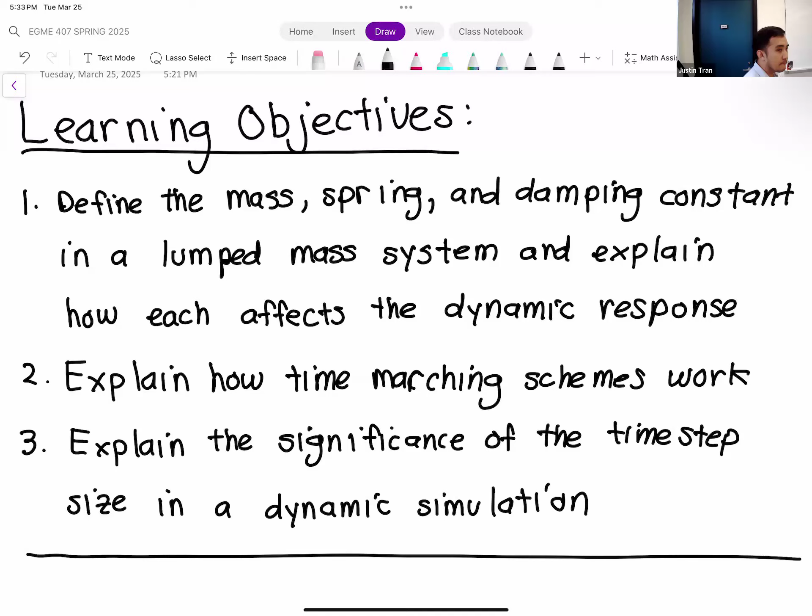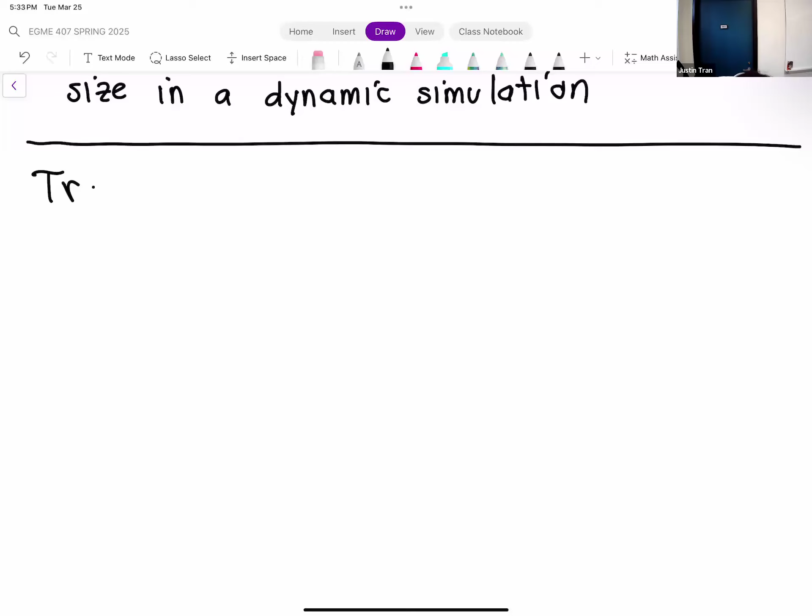So the topic for today and the topic for this week are what I call transient finite element simulations.

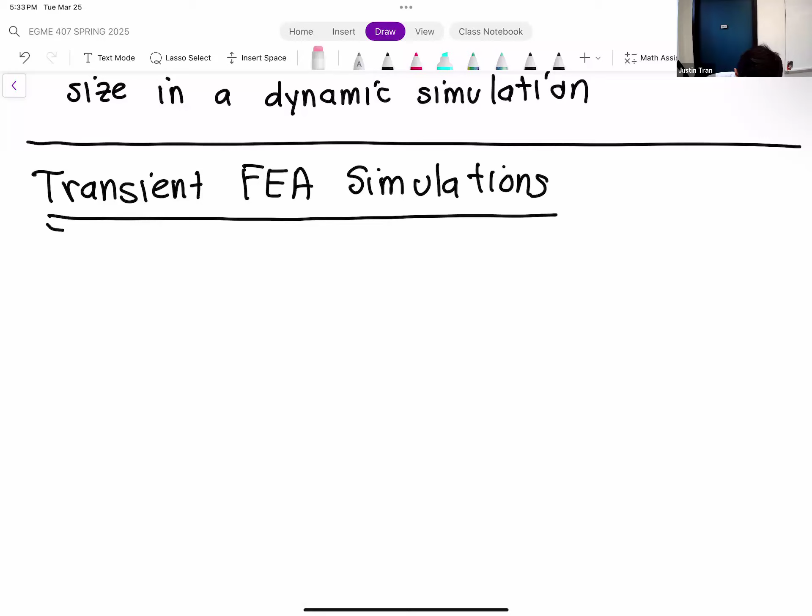Transient simulations are actually a very interesting topic. Depending on the type of work and the type of analysis and systems that you work with, you might work exclusively with transient FEA simulations. There's a lot we can dive into here, but for this class, the way it's structured, we only have a week to talk about it, which is kind of a shame. Just know that there's a lot out there. So transient FEA simulations are nothing more than simulations of engineering systems that change with time.

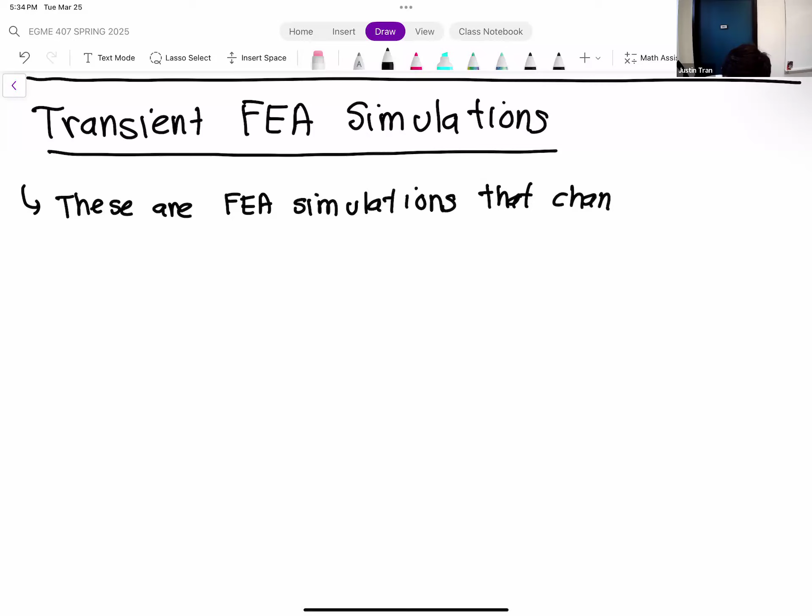Which is a big shift in focus from what we've been doing, because everything we've done so far in this class has been static simulations. Those are situations that do not change with time. So transient is kind of the opposite.

Most commonly, you'll find these types of situations whenever you have some kind of dynamic response. Either a load that's being applied on your structure is changing with time, or maybe something occurs on a very quick basis, and your response changes with time as well. So transient simulations and dynamic response kind of go hand in hand because they mean the same thing.

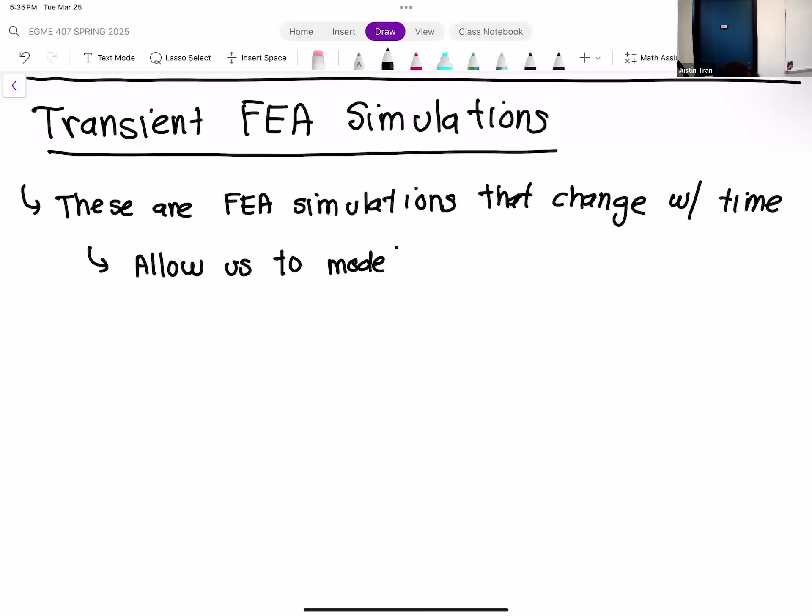So I think for the first time in this class, we're actually going to use a tool in ANSYS that is not static structural. We're going to move away from that for the first time. ANSYS actually has a few different tools or packages to do transient simulation, and we'll mention them a bit. The first one, the main one we're going to use, is something called explicit dynamics.

We'll talk a bit later about what that means, especially what 'explicit' means. And the other tool in ANSYS that we're not going to use, although the setup is very similar, is called transient structural.

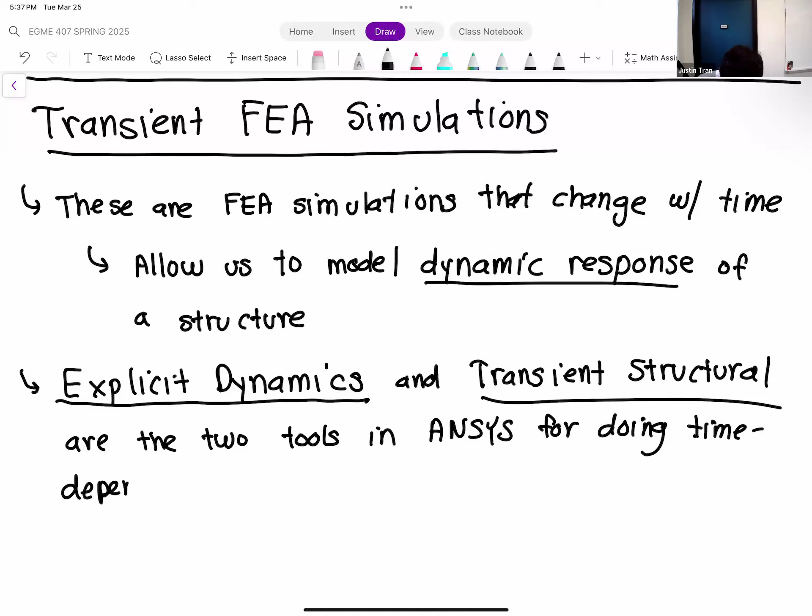So if you want to do time-dependent or unsteady structural simulations in ANSYS, those are the two main packages you can use. Now, any phenomenon that you can simulate with FEA, you can do in an unsteady context. So you can also do an unsteady thermal simulation - there's a package for that.

You can do unsteady fluid simulation, although most fluid simulations are going to be transient just because fluid is always in motion. But for this class, we focus mostly on structural mechanics and structural dynamics, so we're mostly going to use these two, specifically explicit dynamics. When we do our activity on Thursday, we're going to use explicit dynamics instead of static structural.

So like I mentioned, unsteady numerical simulations in general - not just finite elements, but also finite difference and finite volume - is a very, very rich topic, and it's really impossible to go over all of it in one day.

My goals for today are to get you used to some of the lingo, some of the terminology used in these dynamic simulations, just so you know what to expect, and also a little bit of review in terms of what kind of behavior you generally expect from a dynamic structural response.

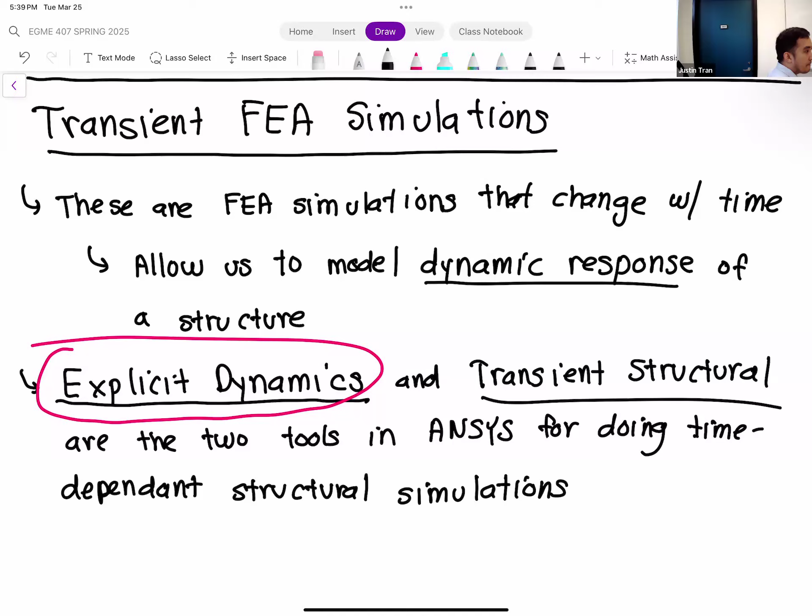Okay, all right, so let's review a little bit of dynamic response first. And to illustrate this, to give us an analogy, let's use a mass spring damper.

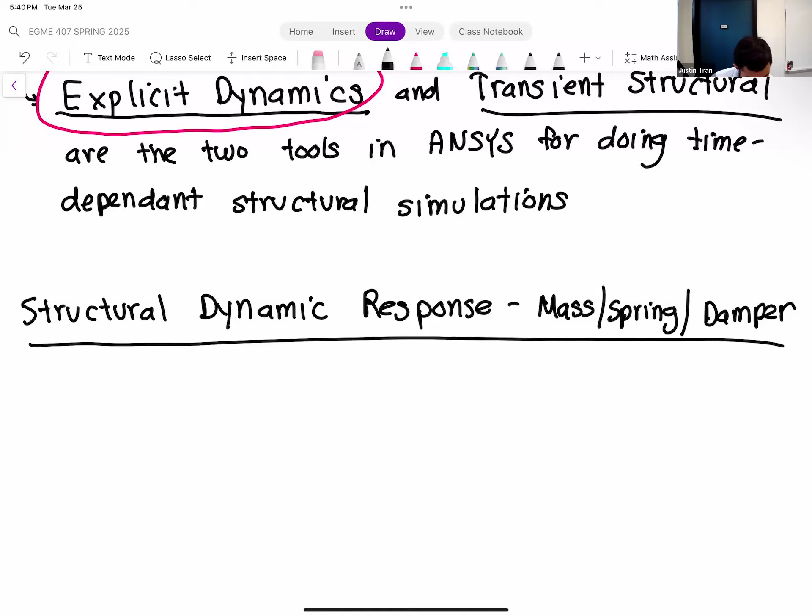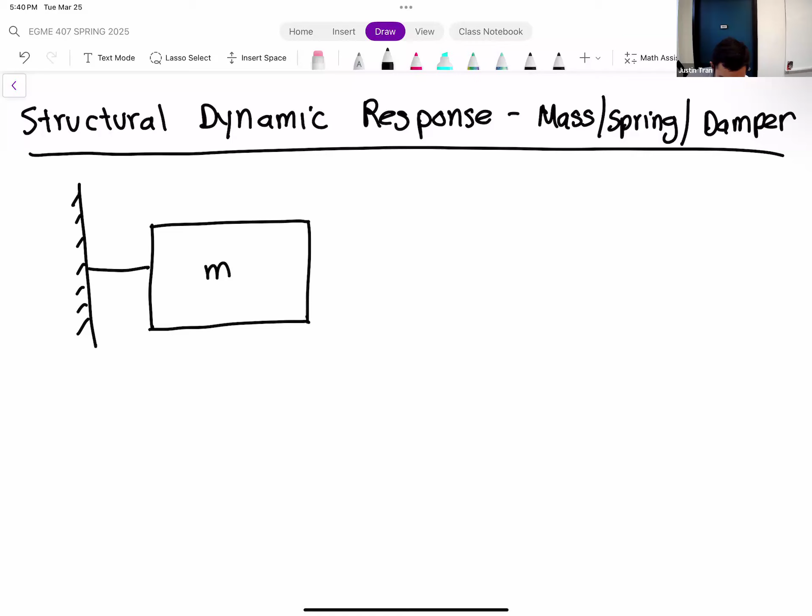Okay, so let me go ahead and draw our mass spring damper here. So we have a wall, which is where our mass is going to attach to. We'll say the mass is on wheels, just so we can displace to the left and right.

And then attached to this mass, we have a spring. So that's going to provide our structural stiffness. Our spring has a spring constant K. And then to provide damping into the system, we have a dash pot.

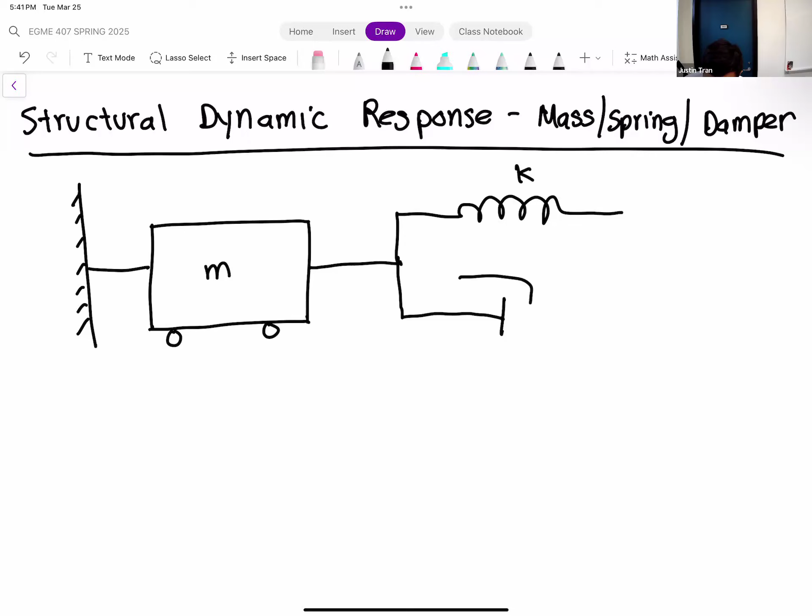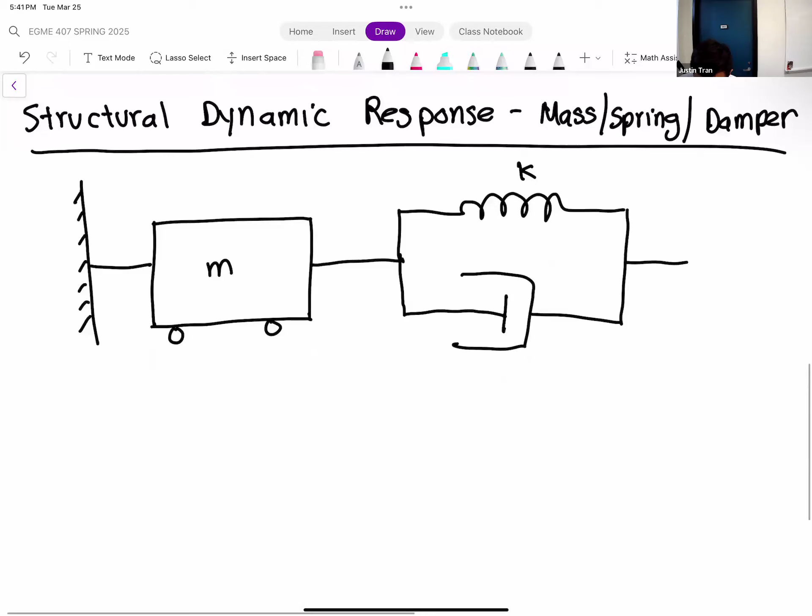So the dash pot or the damper here represents any kind of energy loss that comes, usually due to friction in the system. Usually we give that the coefficient B. And then pulling this entire structure is a horizontal force F.

Okay, so if we model the behavior of the mass, usually for the mass spring damper system we are interested in the motion or the position of the mass M. So what we're modeling here is this position. X here represents the position of the mass M.

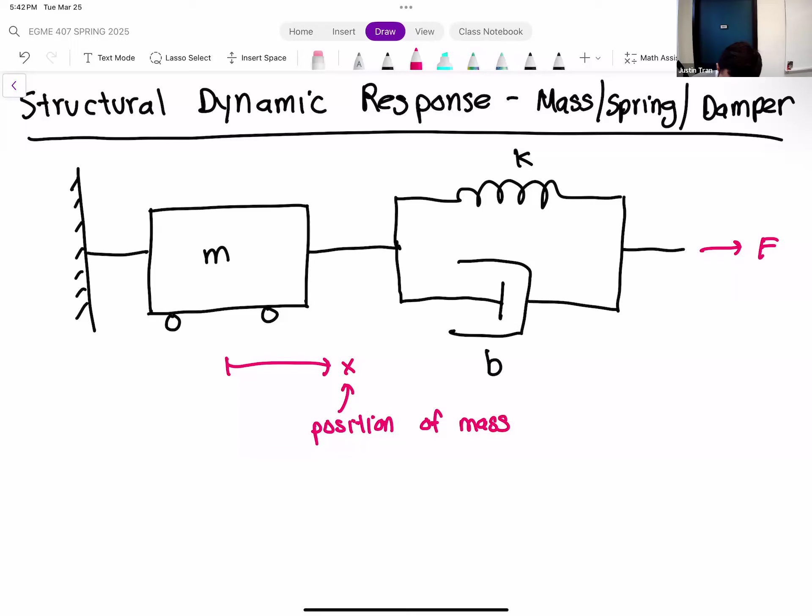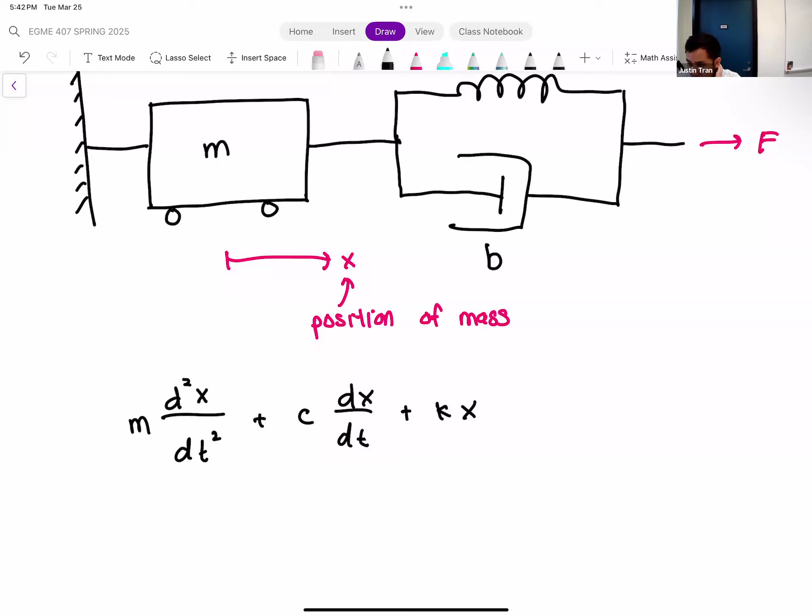Typically, we model this response using a second order ordinary differential equation: M multiplied by the acceleration, but acceleration is nothing more than the second derivative of position. So that's d squared x dt squared, plus C dx dt, plus K times x. That is our spring term here, that's our Hooke's law, that's equal to F.

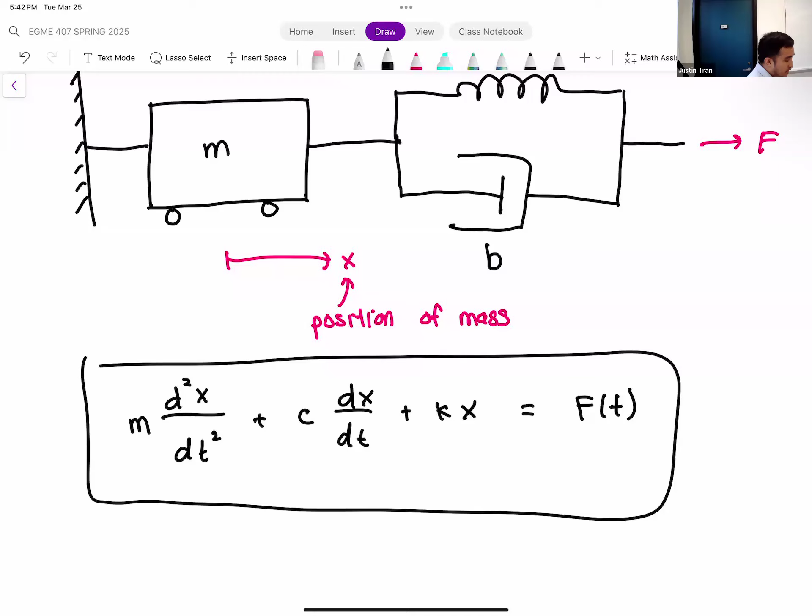Where F here can be a function of time, okay? So it's not just a static force - this is a force that we may push it, pull it back, push it, pull it back, something that we can change with time. So this here is our equation of motion, or the mass position.

So this is just an ordinary differential equation, but there's actually a lot of information you can glean from this. And in fact, a lot of the intuition that we build from the mass spring damper, you can apply that to larger, more complex systems as well. That's kind of the goal that I'm going to go with here. All right, any questions on this so far?

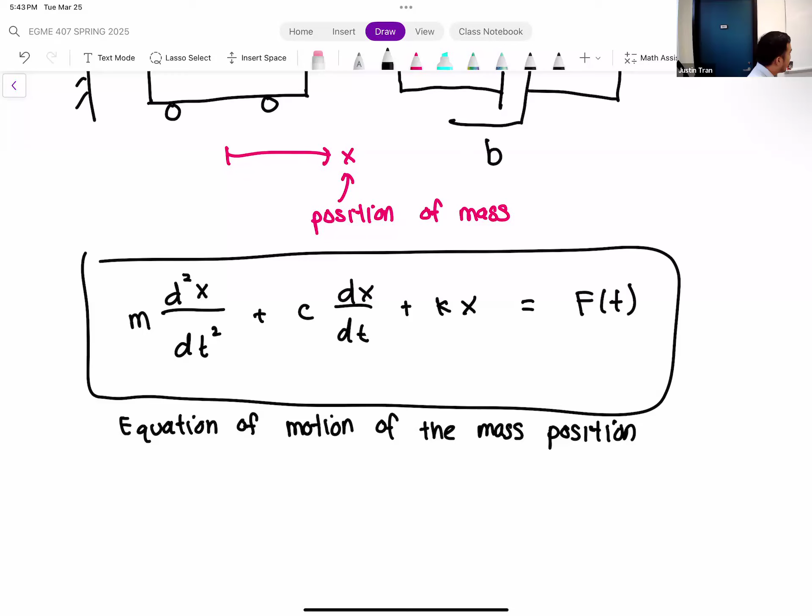Okay, so before talking about the response, let me make the comment that most structures, or pretty much all structures, no matter how complex, you're always going to have a sense of how much mass is in the system, how much stiffness is in the system, and maybe some sense of how much damping or friction is going to be within the system as well.

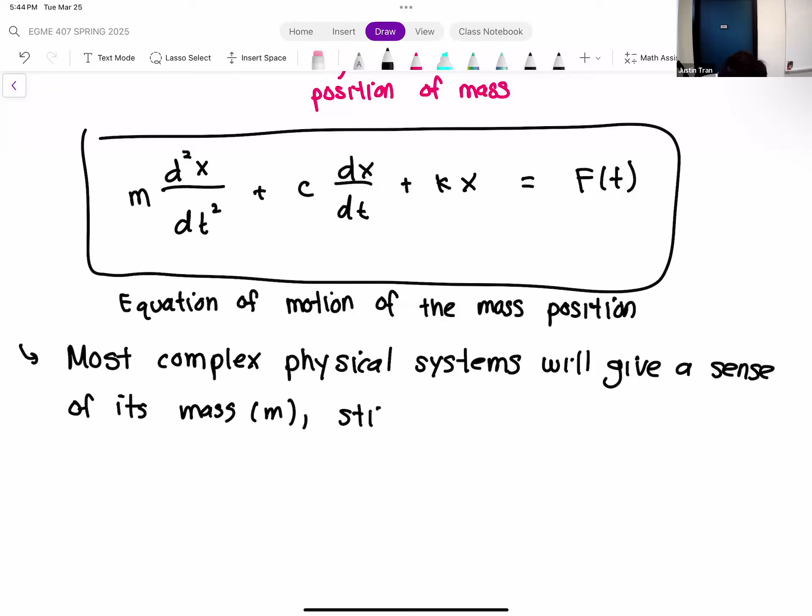So mass obviously is very easy to figure out - you can just compute the mass of your entire system. Stiffness is going to depend on things like the geometry and the material properties as well, so whatever you choose for the Young's modulus is going to affect the stiffness of your system. And the damping often is a function of how the different parts of your system interact, kind of the geometry a little bit. So usually you're going to have some sense from that as well.

Okay, so the goal with this mass spring damper, and kind of the reason why it's brought up - probably this is the 13th or 14th time you might have seen this in your engineering classes - is because a lot of the intuition, a lot of what we understand from the mass spring damper applies to more complex systems as well. Maybe not the exact solution, but at least the character of the solution and the general behavior.

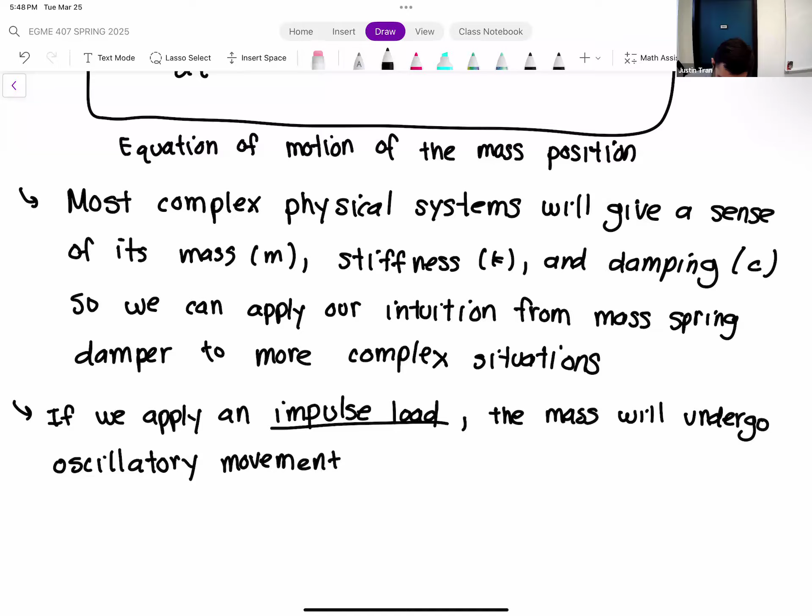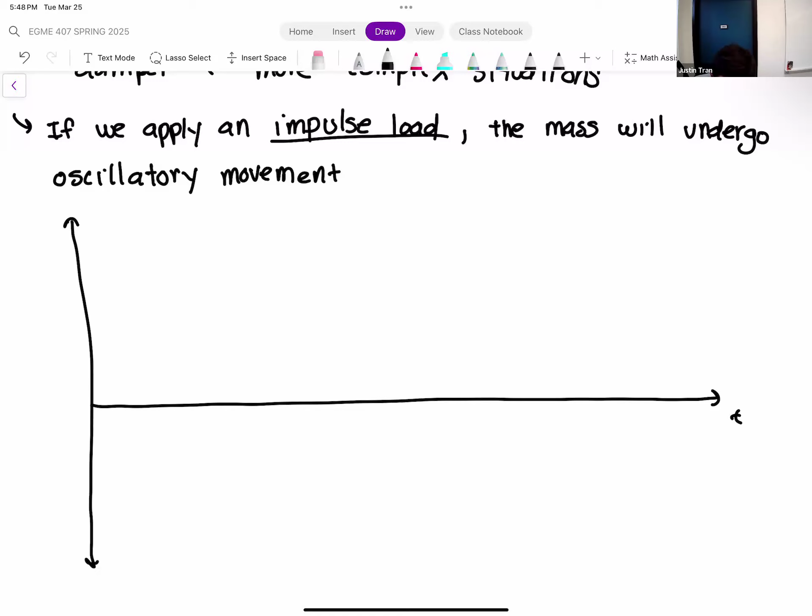And so if we were to plot that out, on the horizontal axis we have time, so we're plotting out the response of our system as a function of time. Vertical axis, we have the position of the mass, x of t, okay?

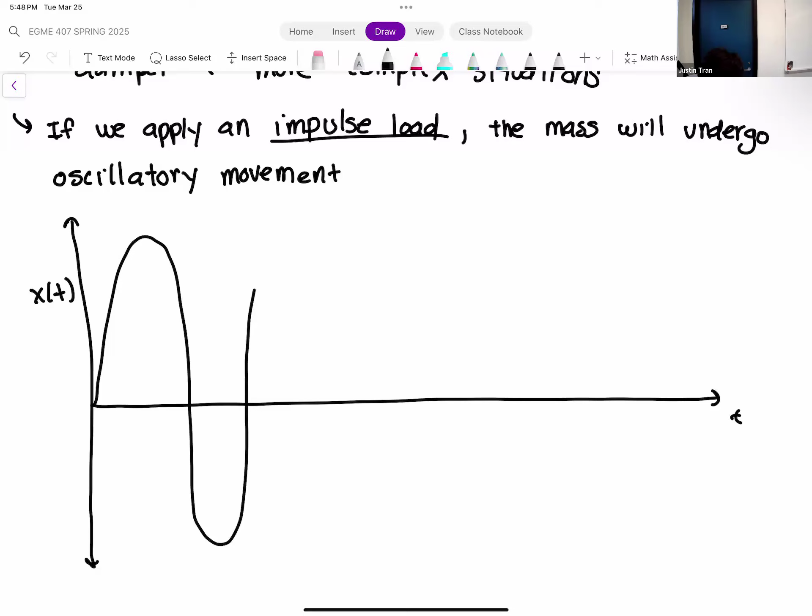So an oscillatory response means that our position of the mass is going to oscillate back and forth, okay? And it's going to look something like this. So that's kind of what it means to oscillate, it goes back and forth. And if you notice the way I drew this oscillation is very intentional - the amplitude of the peaks is decaying as a function of time.

So that's very common as well. Nothing, unless you have a perpetual motion device, most vibrations or oscillations die down with time, right? And so if we were to plot this out, our x of t here will be a multiplied by e to the minus bt, multiplied by sine of omega t. Where if you break down this response, we have a times e to the minus bt. What we have here is called a decaying amplitude.

This shows that the amplitude of oscillation for this response is decreasing as a function of time. Then we have sine omega t, and that is the oscillatory component - the part that's going to oscillate back and forth.

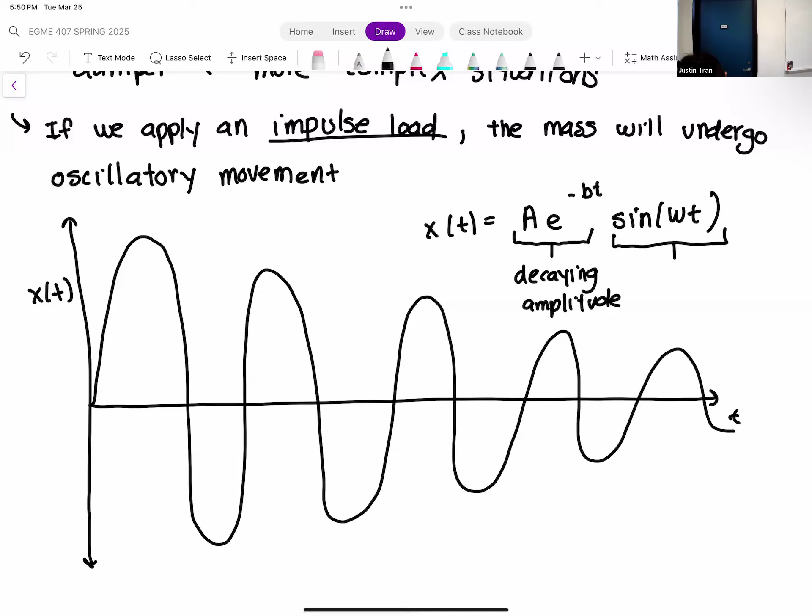So this is kind of the general dynamic response for any kind of structural system, okay? So if you apply an impulsive loading, it may not be on a time scale that you can observe clearly with your eyes, but there is some kind of vibration there, right?

So if I were to take this projector thing and just hit it like that, right? You can kind of see - well, I can see because I'm right in front of it, but you guys might be able to see. Zoom people, you definitely can't see, right? But each time I hit it, there's a little bit of oscillation that goes on - it goes up and down a little bit before it settles into its final position.

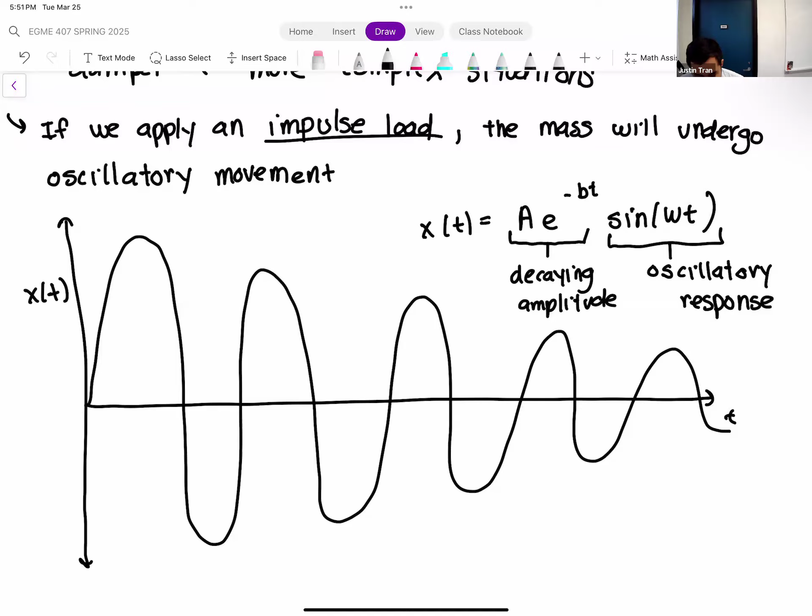So this idea that when you apply impulse loading to a structure, the dynamic response is almost always going to be oscillation of some kind, right? This is especially true if you have a linear isotropic material, linear isotropic stress-strain response in the system.

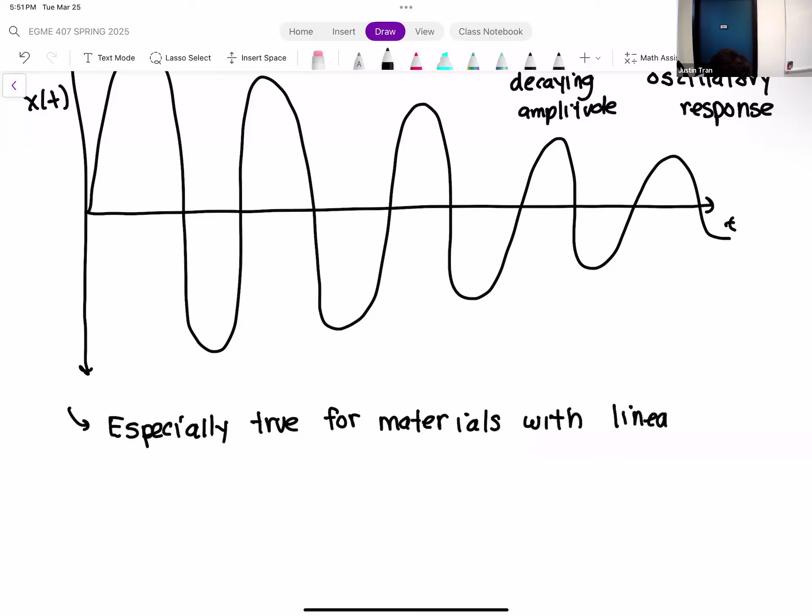Which, if you notice in this class, that's typically what we work with. So typically we work with materials - we assume just a very simple linear elasticity for our response. So we're going to be in this regime, right? And so when we run the dynamic simulation on Thursday, you're going to observe this.

If you haven't, I know some of you have done this activity with me before, but on Thursday we're going to be simulating a car crash. We're going to be taking a car's frame and just crashing it against a wall. You're going to see a little bit of oscillatory response. That's because we are providing an impulse loading, and the car is going to be impacted by the wall only for a very brief moment of time. But it's also a result of the linear elastic material that we're assuming for this car, okay.

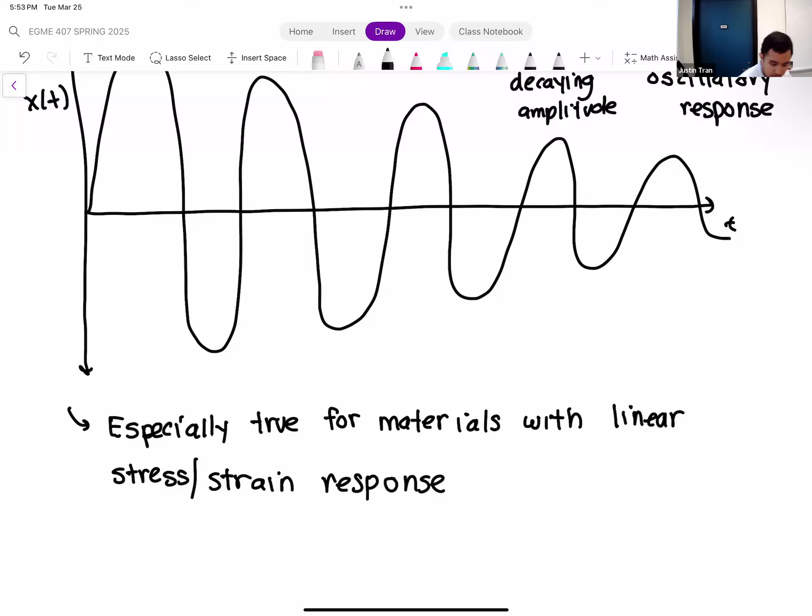And so the character of the oscillatory response is a big part of doing dynamic structural simulations. Any questions on this so far? Okay, all right. So the big question is, how do the properties of our structure, or the properties of our simulation, affect the dynamic response?

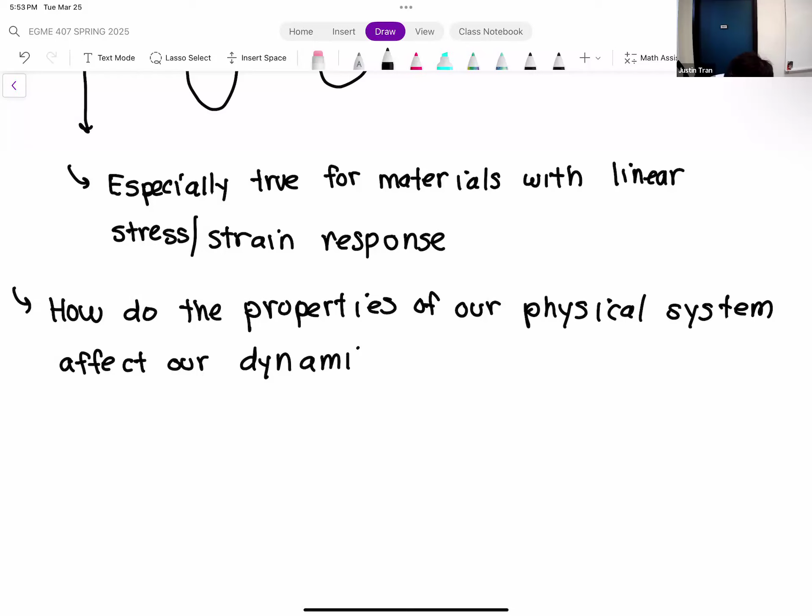And so in particular, just for the case of simplicity, we're going to focus on the properties of our mass-spring-damper and see how that affects our dynamic response. So we'll go one by one, starting with the mass. Generally the mass represents the amount of inertia there is in your system. And if you remember the definition of inertia - it's the ability of a structure to resist changes in motion. So the more mass you have, the more inertia you have, the more you're going to resist changes in your motion.

So generally what we say is that as the mass increases - if you increase the mass of your system - it's going to reduce the frequency of the dynamic response.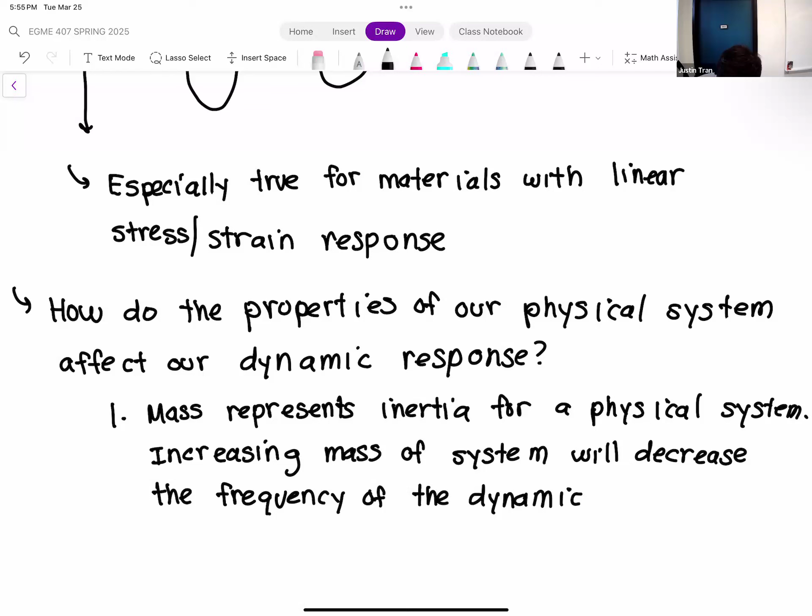Because the frequency of the dynamic response represents each time the mass oscillates up and down, that represents a change in momentum. So if you have more mass, it's going to resist that. The more mass you have, the smaller the frequency.

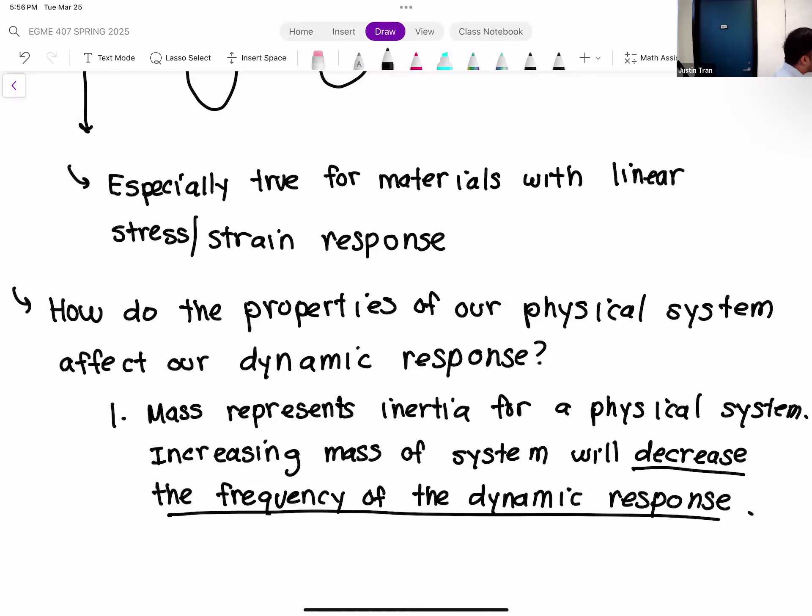Number two, let's look at the stiffness. If you think back to what a spring constant represents, it tells you how much restoring force the spring is going to apply, right? Because that's the hallmark of a spring. If you deform a spring, stretch it or compress it, it's going to apply a restoring force to bring it back to its equilibrium position.

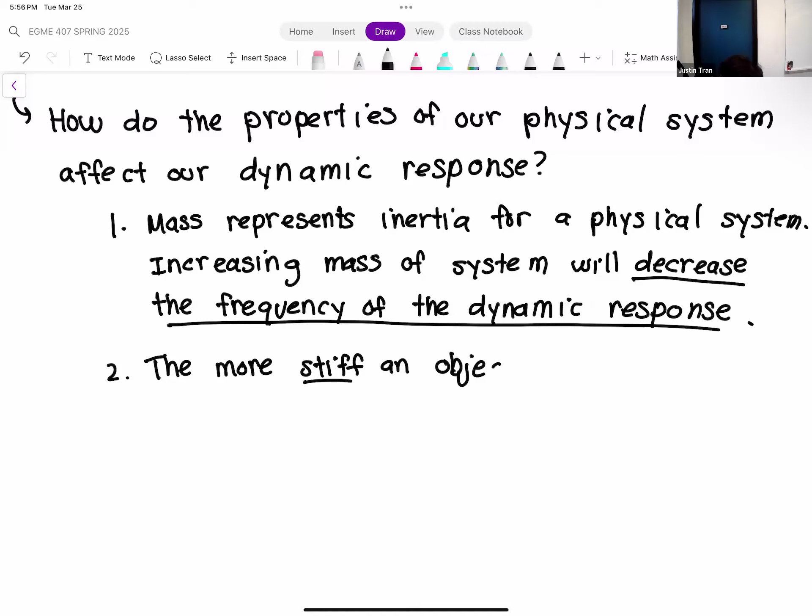Every structure has a stiffness, and like I mentioned, that's a function of its material properties and its geometry as well. So the more stiff an object is... and the main property you use to measure this is the Young's modulus.

The stiffness of a structure has the opposite effect of the mass. The more stiffness you have, the more internal forces, the higher stresses you're going to have internally when you deform your structure away from its equilibrium position. So the more stiff a structure is, it actually increases the frequency of the dynamic response.

So mass and stiffness kind of work opposite to each other. Now, granted, sometimes mass and Young's modulus are correlated for a material. Generally, the more dense or heavier materials also have a higher Young's modulus, so those effects kind of cancel out in a way. But there are materials that are very light but have high stiffness, and also materials that are very dense and heavy but have low stiffness. Something to keep in mind.

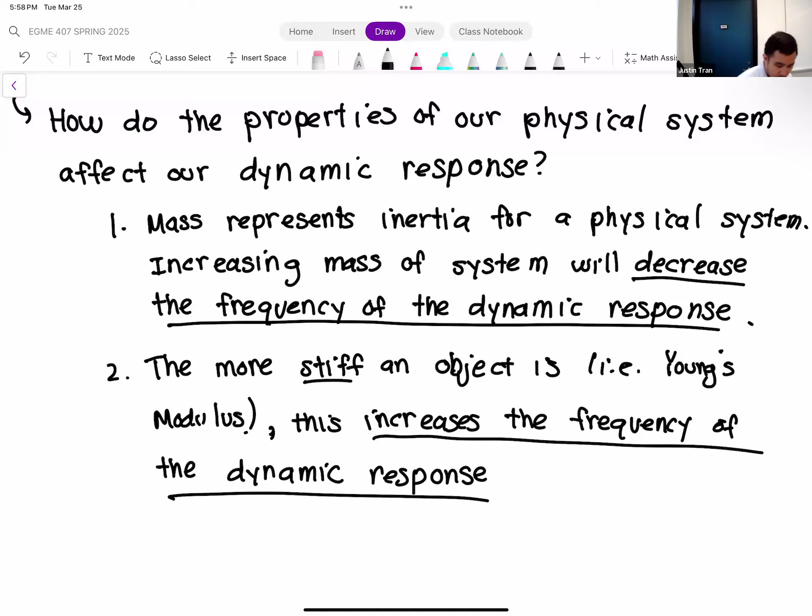So the last property we have is the damping. Damping represents how well your structure can suppress the dynamic response, how quickly it can go back down to a static situation.

Now, damping, between the mass and the stiffness, is a lot more difficult to quantify. It's not something you can just look at a structure and measure. Usually it's a very complex thing in terms of how the different parts interact, the coefficient of friction, things like that. But generally the higher your damping, the more easily the response gets suppressed.

Usually the way people measure damping is you don't measure it beforehand. Usually you do an experiment or a simulation and observe the response, and from that you get an idea of how much damping there is in that system. So damping is very hard to quantify, but it is there, and you do have to account for it when thinking about your dynamic response.

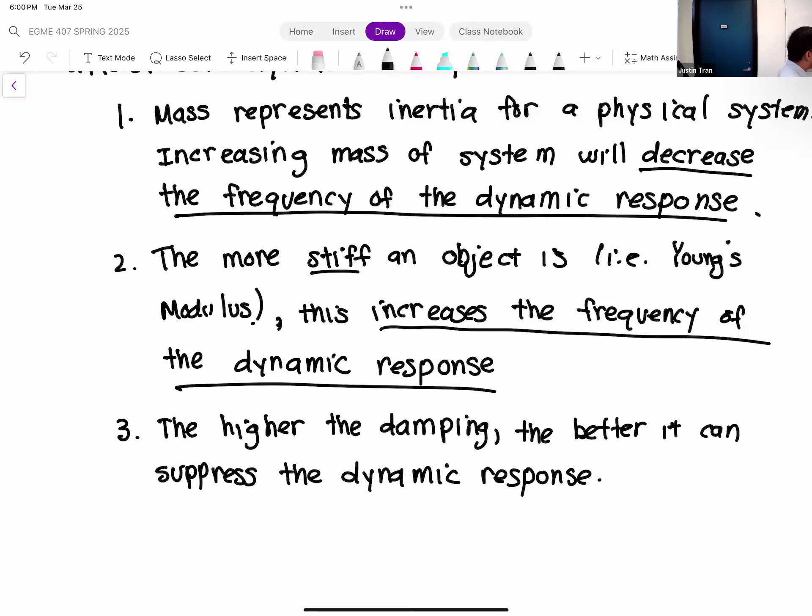So like I mentioned, a real life situation is a lot more complex than this, and it's not just going to be a straightforward mass spring damper, but a lot of your intuition in terms of how you understand how the system works can also be applied to more complex situations as well.

Any questions on this? Okay, all right, so let's go ahead and move on. That's all I kind of wanted to say about dynamic response.

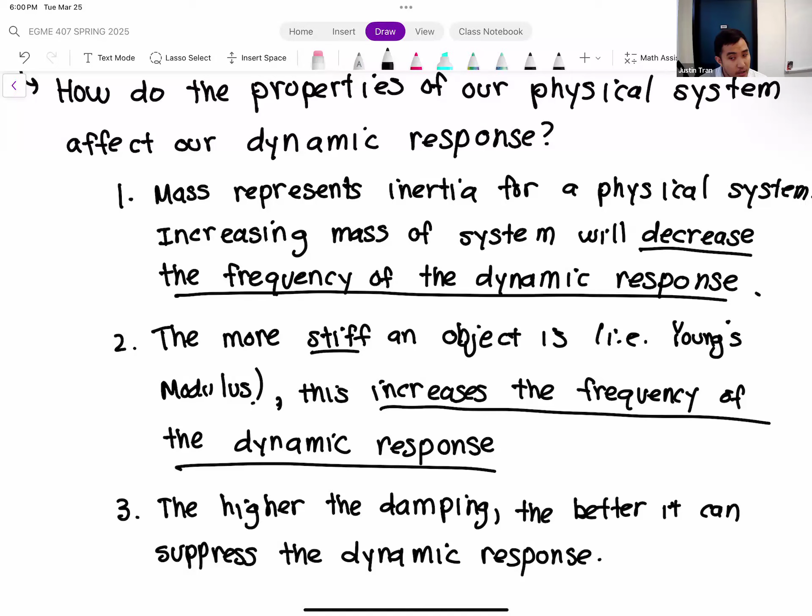Let's talk about numerical solutions to unsteady problems. So basically, how do we actually solve these transient situations within the context of finite elements?

Now, this is the part, we have about 45 minutes, about 40 minutes. This goes way deeper than what we're going to talk about today. The goal of this section is not to give you a thorough background on the theory, but just to give you some familiarity with the terminology, what each particular parameter and setting is used for, because dynamic problems use a very different framework than our static problems. So it's important to know what these are before you jump into it.

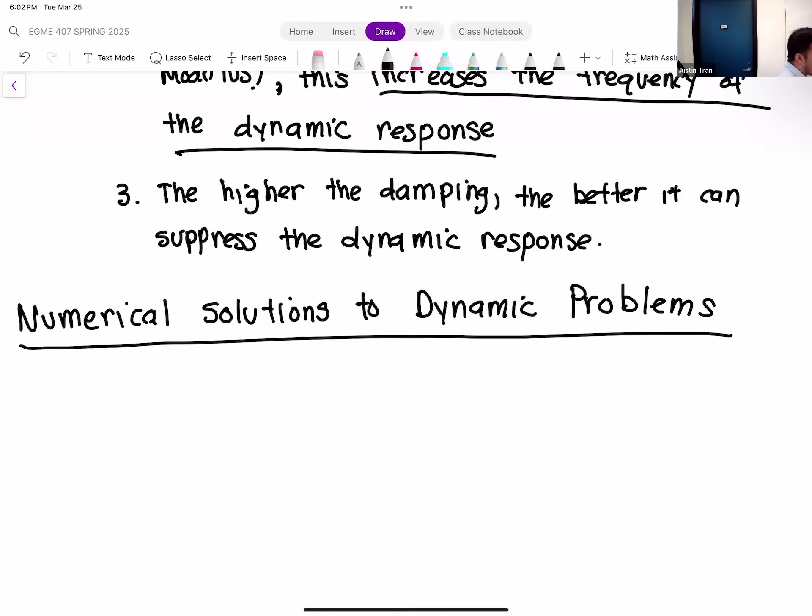All right, so the first thing to understand is that when you do a dynamic simulation or a time-dependent simulation, the cost of the simulation is much higher than that of a static simulation.

This cost is because of two things. First, the number of computations you have to do is much higher. So what some of you are going to see on activity 5 is that we're going to spend maybe about 30-40 minutes talking about the setup of the activity. Then you'll hit go, and you'll sit there and wait for like 5 to 10 minutes for the simulation to complete. So the amount of time it takes is much higher.

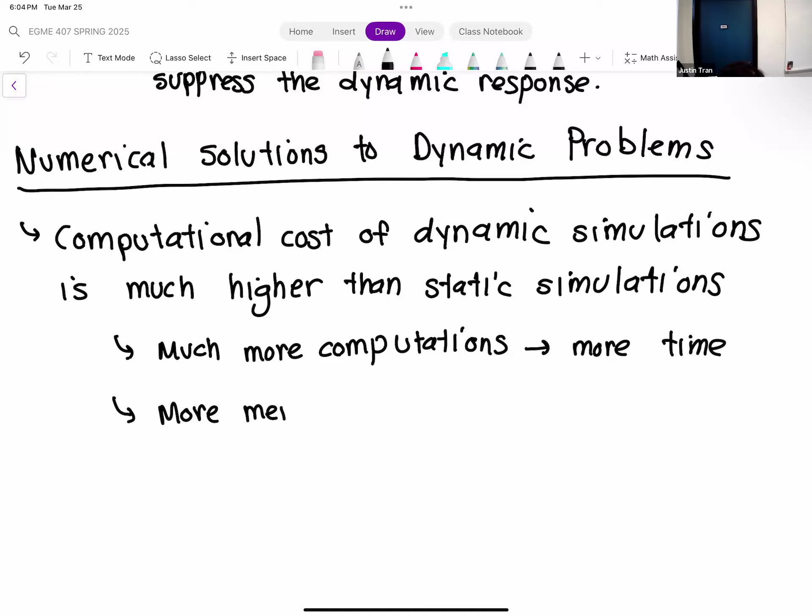Because if you think about it, if you're simulating a time-dependent situation, that means your results are also going to change with time. Your deformation is going to change with time, your stresses are going to change with time, your strains are going to change with time as well. The only way to really visualize that is if your results were a video instead of a static image.

If you think of a video, or an animation, as nothing more than several static images played back to back very quickly, and if you think of a typical resolution of maybe 30 frames per second, then even just to simulate 1 second of dynamic response, you need to do 30 static simulations for that 1 second. That gives you a sense of how expensive these are.

So dynamic simulations - part of the reason we don't do too much of it in this class is because we just don't have the computational power. If you really want to give a good treatment for this, we need probably access to a cluster of some kind.

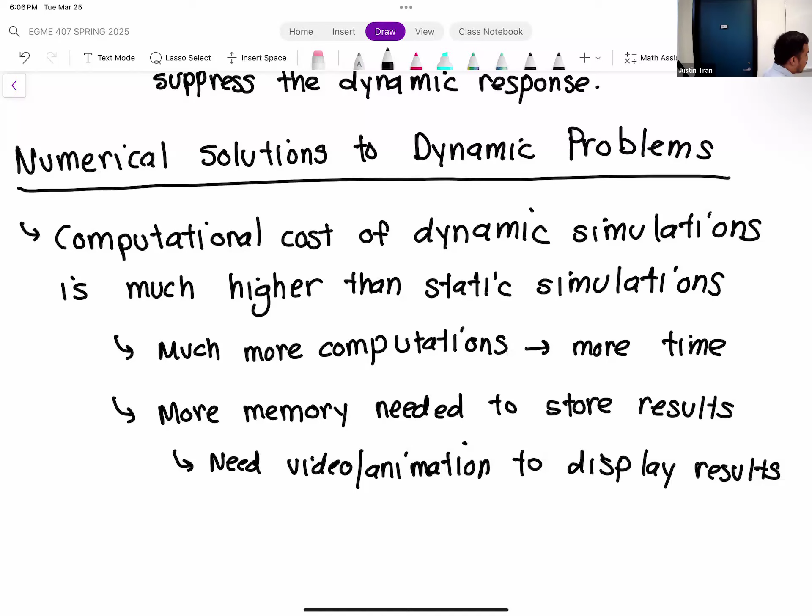The other thing to keep in mind with dynamic simulations is that time is now going to be a variable that you need to account for in your response.

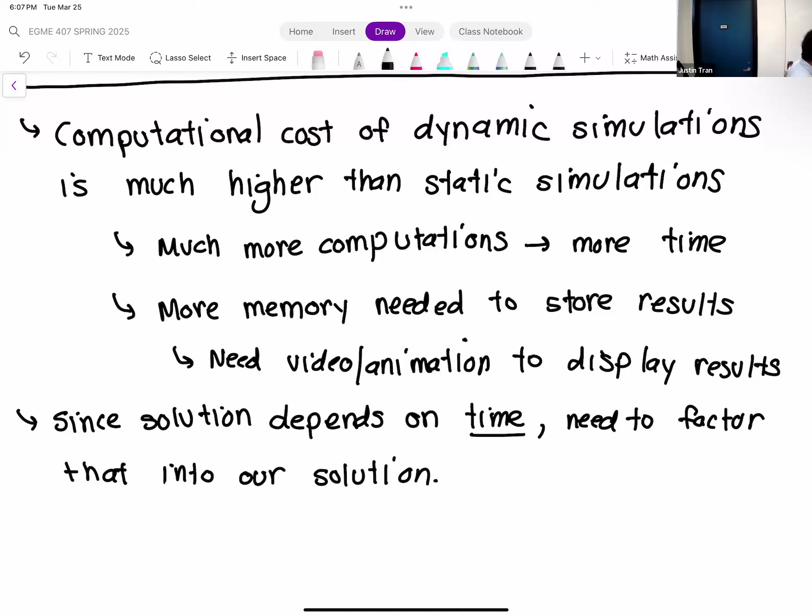In fact, if you look at the governing equations for these time-dependent situations, our governing equations are actually going to change because there's going to be an additional unsteady term, or an additional derivative with respect to time, that we have to discretize and solve as well. So to solve the time domain, we actually have to use another full collection of different numerical techniques that are separate, but also work together with FEA at the same time.

Usually the way I like to think about it is that FEA, or finite elements, is used to solve for the spatial variation of your solution. We've used FEA to solve for the spatial changes in the deformation, or spatial distribution in the stress field, in our simulations. The time field is solved using a collection of techniques called time marching schemes.

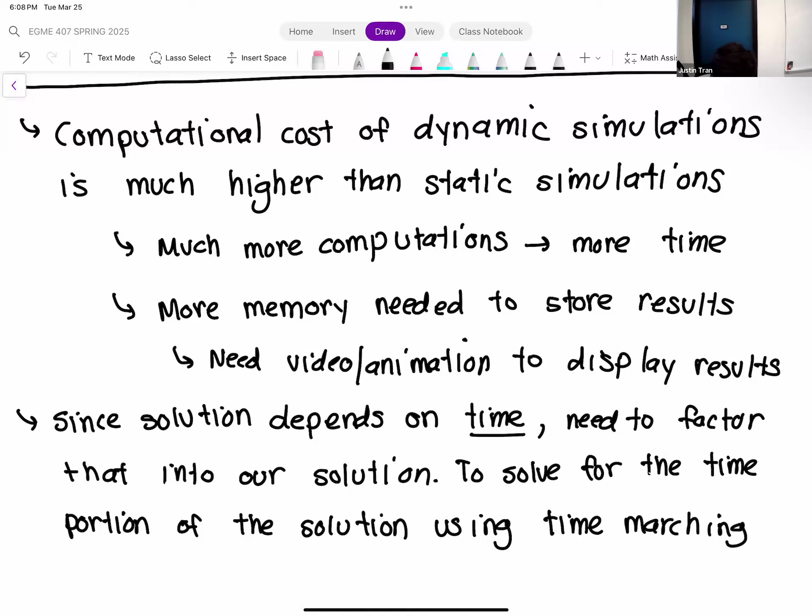So time marching schemes, that's just the name of the numerical method that's used to solve for the changes in time for a finite element simulation. Time marching schemes, again, there's a lot to discuss there. This isn't the venue for that, but we will go over the basics. So basically the idea with time marching schemes is that you solve for the solution one step at a time.

Time is kind of fundamentally different than space. Because the thing with FEA is that you have your structure, it takes up a certain amount of volume in space. You apply your boundary conditions and you solve for the static response in the entire structure all at once. Just because if I were to look at the static response of this table, that corner of the table doesn't really care what I'm doing to this side of the table, at least not directly. So you solve for the entire table at once.

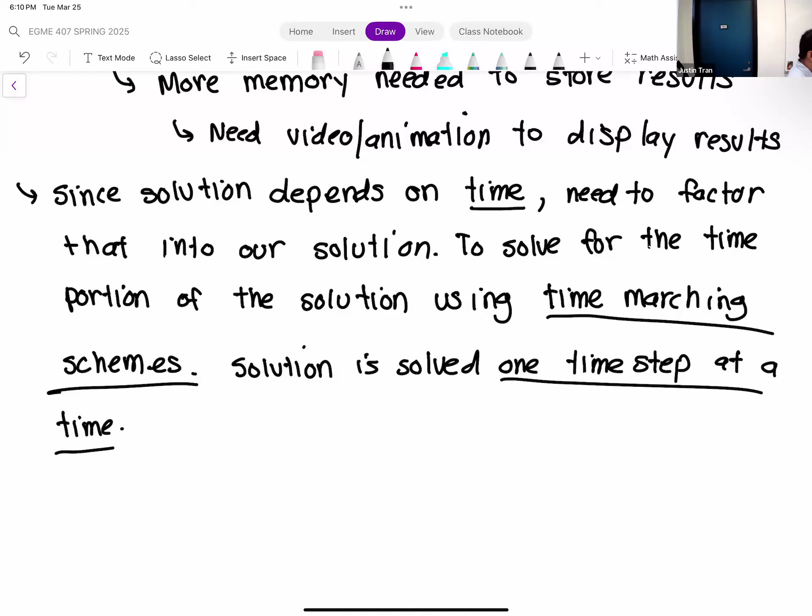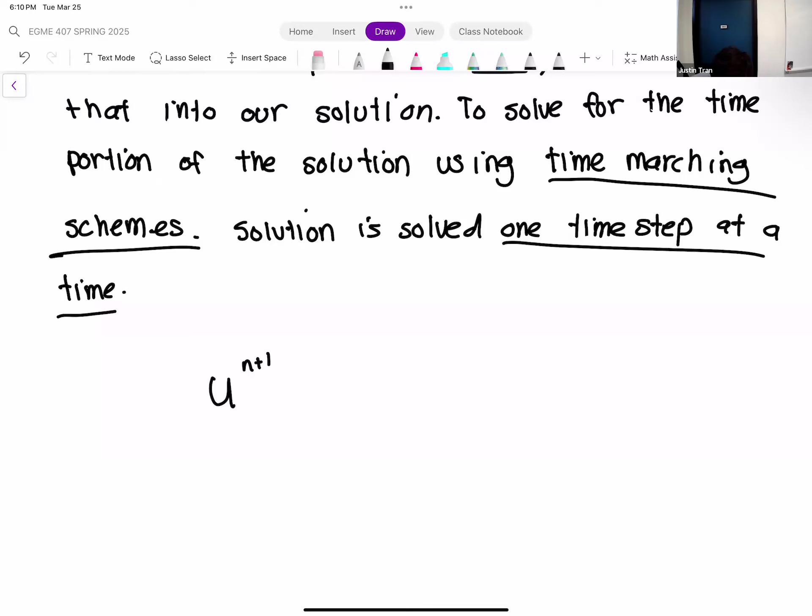So the idea is like this. If you were to solve for the solution at the next time step, we represent that with u superscript n+1. This is going to be equal to a function of u of n. So u of n, this is the function at, or the solution at, the current time step.

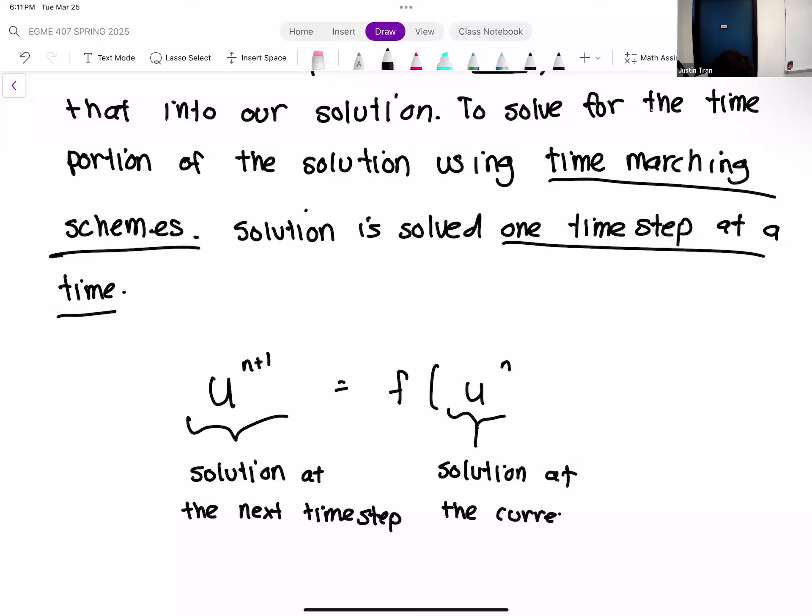You need to know what's happening now before what happens in the future. And this is going to be a function of all of our system parameters, so mass, spring constant, damping, density, geometry, things like that. Just like the static response depends on the loading, boundary conditions, material properties, all that stuff still matters, of course.

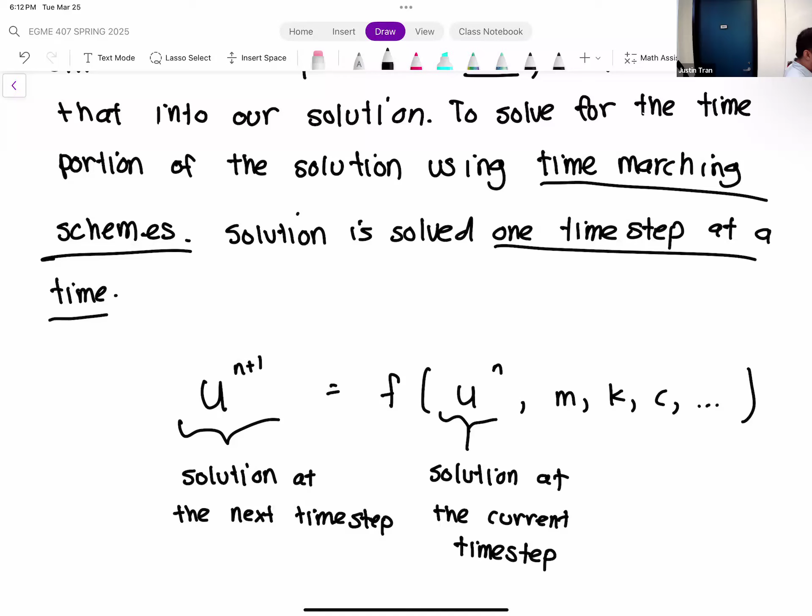But the most important thing is that you can only solve the time response one step at a time. Each time you solve for the solution at the next time step, you can consider that as the cost of one static simulation.

So you're literally marching the solution forward, one step at a time. One thing you're going to find out that you need to specify in an unsteady simulation is something called the initial condition. The initial condition is different from the boundary conditions. The initial condition basically tells you the state of the solution at the beginning of the simulation, so at time equals 0.

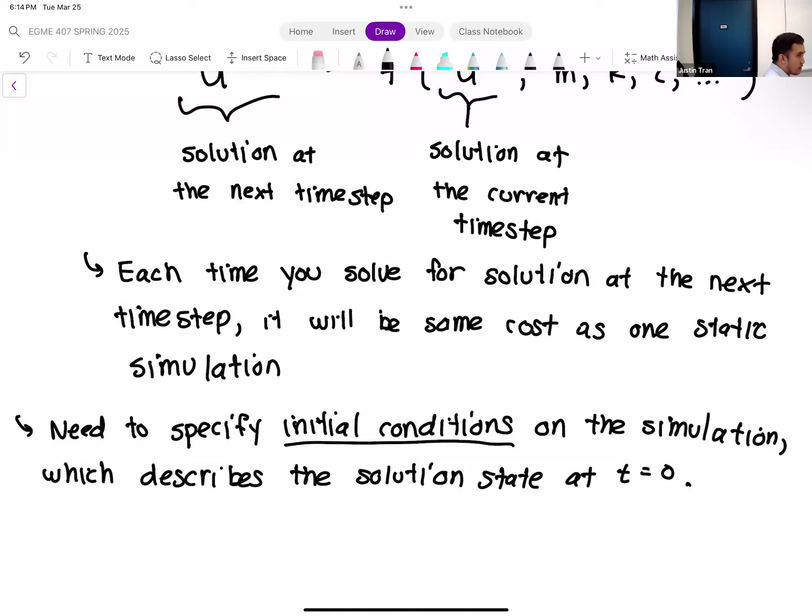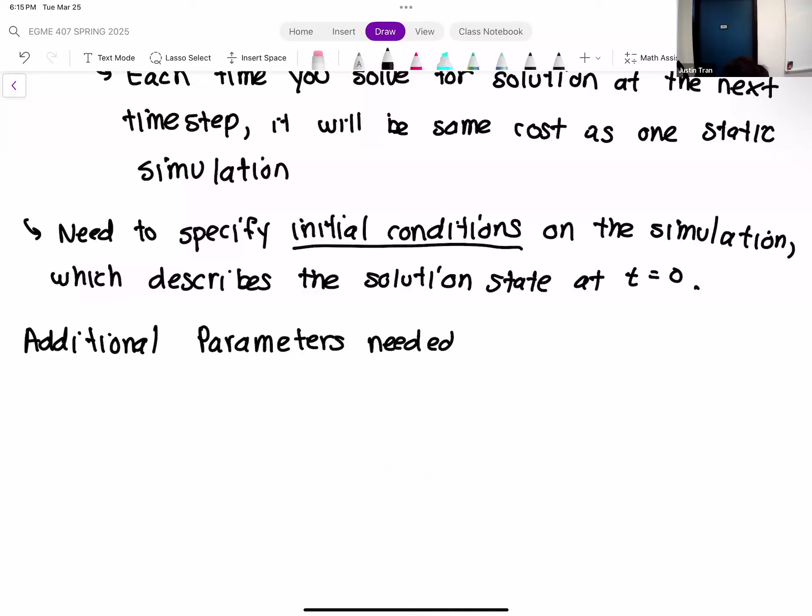Okay good. So with time marching schemes, there are a few additional parameters that you have to specify in order to define the trajectory of the time response. These will be additional parameters that you have to specify on top of the static simulation, on top of the mesh, on top of the boundary condition. Initial condition is one of them, that's one thing you have to specify. But there are other things you have to specify as well.

Now ANSYS does automatically specify some of these for you if you don't specify them manually, so that's important to note. We aren't going to specify everything on Thursday because we're going to let ANSYS choose it for us. But there is at least one that you have to do in every dynamic simulation. This is a very common parameter that you have to set for most dynamic codes. This is one we're going to let ANSYS select automatically for us, but it's actually a very important parameter for the dynamic response or dynamic simulation, and that's called the time step size.

Okay, remember, like I mentioned, for a time marching scheme, you're going to march the solution forward one step at a time. Now the time step size tells you how much physical time exists in between each of the different steps in your solution.

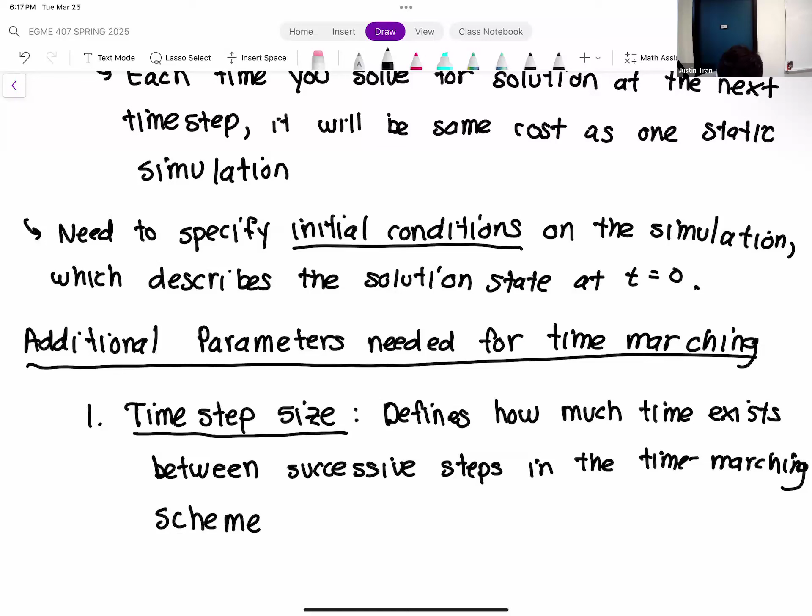The time step size symbolically, usually we give it the symbol delta t, or sometimes we call it dt. Usually it's delta t if you're writing with a pencil and paper. If you're writing an email, it's usually dt because you don't want to pull out the symbol for delta. It depends on the context, but they kind of mean the same thing.

So visually, I like this kind of visual here, where if you think of your dynamic response as a timeline, right? You're basically simulating the response of your structure as time goes on this line. But you're not solving for the system response at every single possible time here. You're solving it at discrete points in time.

So this may be n is equal to 1. This is n is equal to 2, n is equal to 3, 4, 5, and 6. These are all the discrete points in time in which you're solving for your response. The time step size is the amount of time that elapses in between each of these points that you're computing. So this distance here, that's delta t.

Now, in the most basic setup for an unsteady simulation, you typically specify a constant value for delta t, and so the space in between the time points is kept constant. This delta t, this is delta t, and so on and so forth.

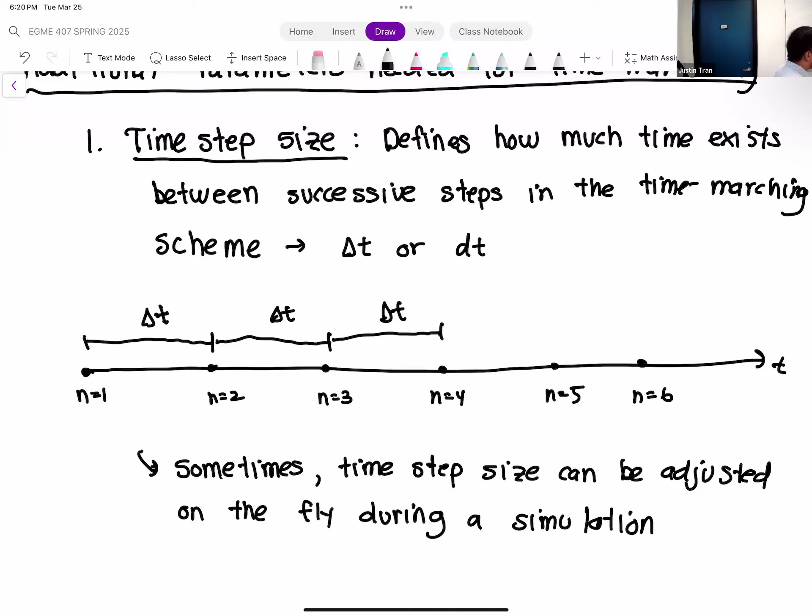But just like the mesh size, the smaller that you set your mesh size, it's going to make your results more accurate, but it's also going to increase the cost. Same thing here. So a smaller delta t is going to increase your cost, which sometimes is actually pretty significant for a dynamic simulation as well.

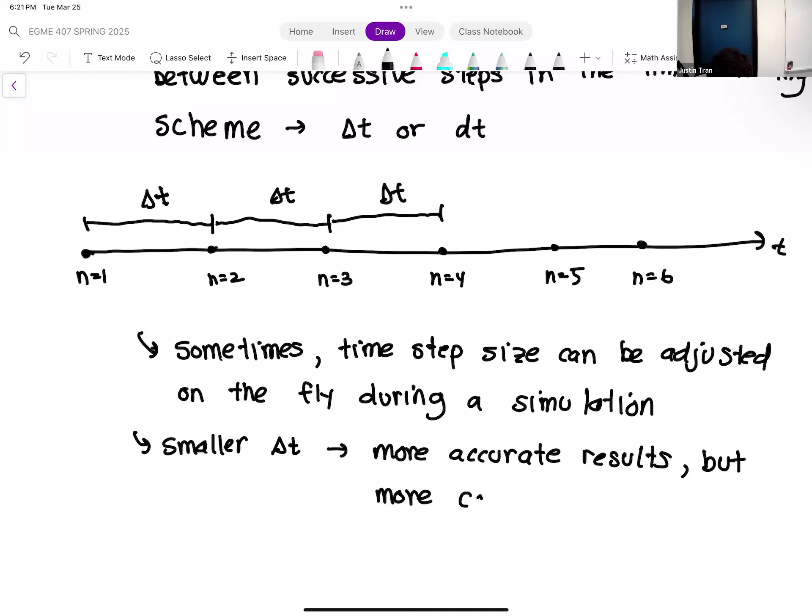Okay, so the idea with dynamically adjusting the time step size follows the same theory as why you would refine your mesh. We spent a lot of time in this class talking about refining your mesh in the areas where you need it in the simulation. In areas of your model that have a high stress concentration, or high solution gradients, those are areas where you want to refine your mesh so that you spread your cost out more efficiently.

So the same thing applies with the dynamic response. Often your dynamic response is not even in terms of the changes. There might be a lot of sudden changes in a very small period of time, and then maybe a long period of time where not much has happened. So the idea with adjusting the time step size is that you can make your time step size really small for those times where a lot of activity is happening, and when not much activity is happening, you can spread it out a bit more.

It does get a little bit complicated with the post-processing when you have an adjusting time step size, unless you have a software like ANSYS that organizes it all for you. Sometimes it can be very hard to process everything, so for most softwares I've worked with personally, we kept a constant time step size. But there are motivations, there are reasons for why you want to adjust it in real time.

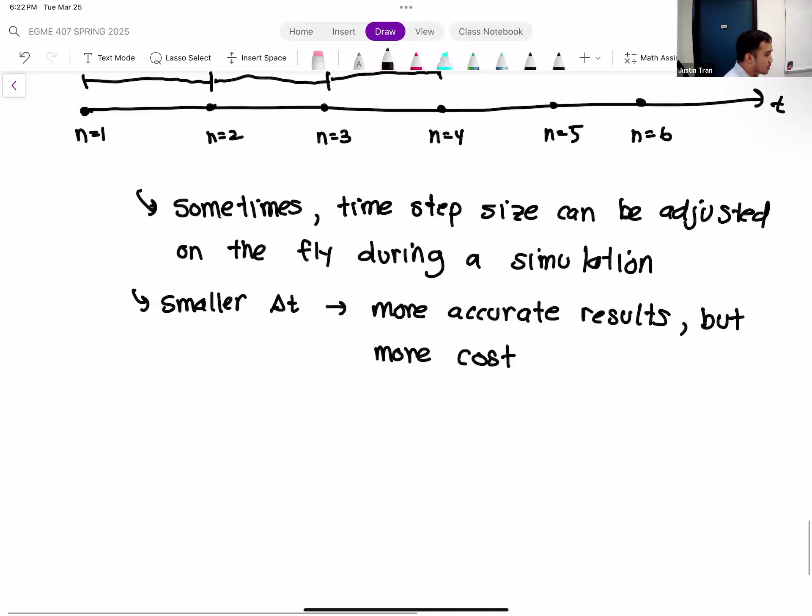So how small should you set your time step size? That's kind of the million-dollar question.

The general rule of thumb that I use is think about your dynamic response and how quickly things are changing in your dynamic response. Just remember that whatever you set for the time step size, that's going to be the resolution of whatever you can capture in your simulation.

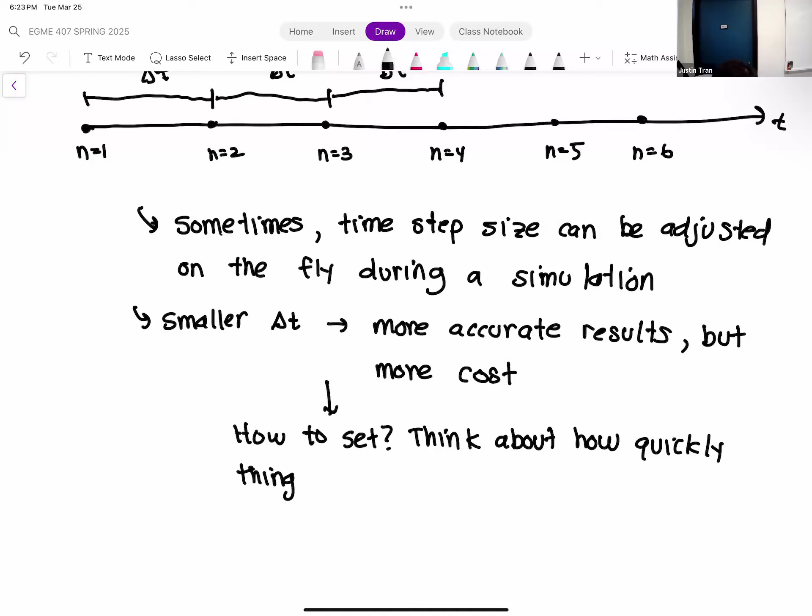Think about how quickly things change in the dynamic response. If you expect things to change on the order of milliseconds, the solution at 1 millisecond is going to be different from the solution in the next millisecond. You want to make sure your time step size is small enough to capture that change. Generally my rule of thumb is, if you can think of a time scale for how things are changing in your simulation, at the very least your time step size should be 1/10 of that.

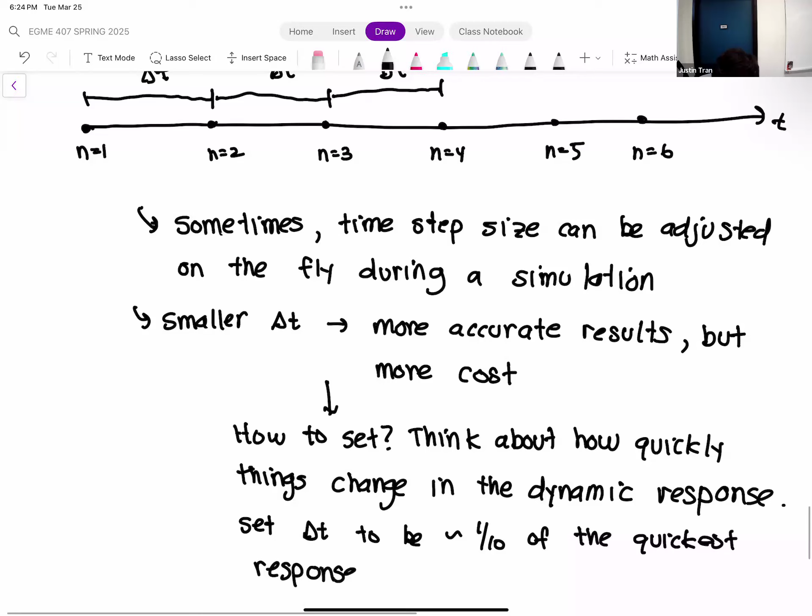For example, a lot of the work I do for my own research is simulation on cardiovascular flows. A very natural time scale in cardiovascular flows is the rhythm of the heart. Typically for a normal person, their heart beats about once per second, so that's about 60 beats per minute. That means that if things are changing on the order of 1 second, maybe you want to set your time step size to be about 0.1 seconds at the very least.

Oftentimes I want to set a time step size that's a lot more fine than that because there are certain flow characteristics happening on a much smaller time scale. But at the very least, if I know things are going to be changing on the order of 1 second, I should set it to be 0.1 seconds. So think about your dynamic system, how quickly things are going to change, and set your time step size to be at least 1/10 of that, maybe sometimes even finer. But 1/10 I would say is the bare minimum in terms of being able to capture that accurately.

Any questions on this?

We spent a lot of time talking about the time step size, even though it's not something we're going to set on Thursday, because in most other softwares, time step size is probably the most important parameter you set for the time marching scheme. Now the other parameter you have to set, besides the time step size, and this one you will have to set on Thursday, is the end time for your simulation.

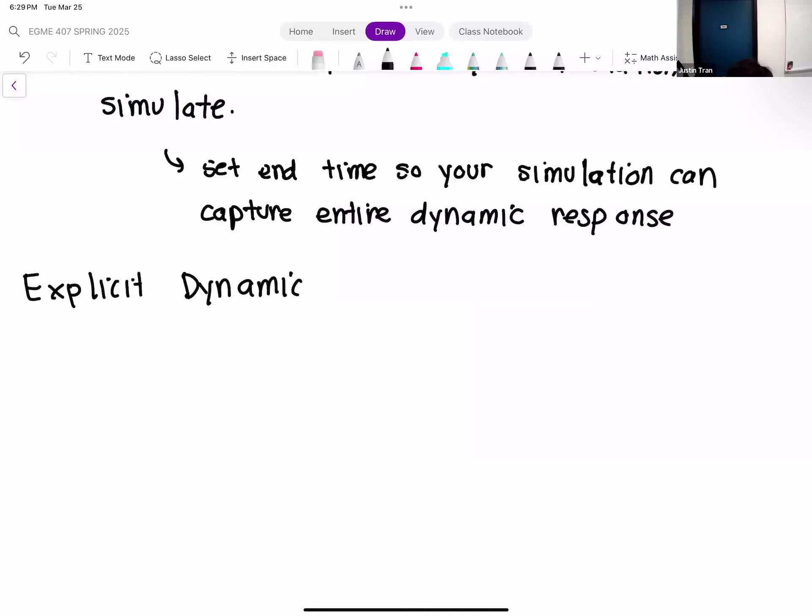Let's talk about explicit dynamics versus transient structural.

So on the surface, these two tools kind of do more or less the same thing. So you have a structural system, a dynamic response you want to simulate, and both of these will allow you to do that.

So actually, for the activity on Thursday, we're going to use explicit dynamics. You could probably do it in transient structural as well, so you should get probably the same thing, more or less. The difference between these two techniques is the technique in which they apply the time marching scheme.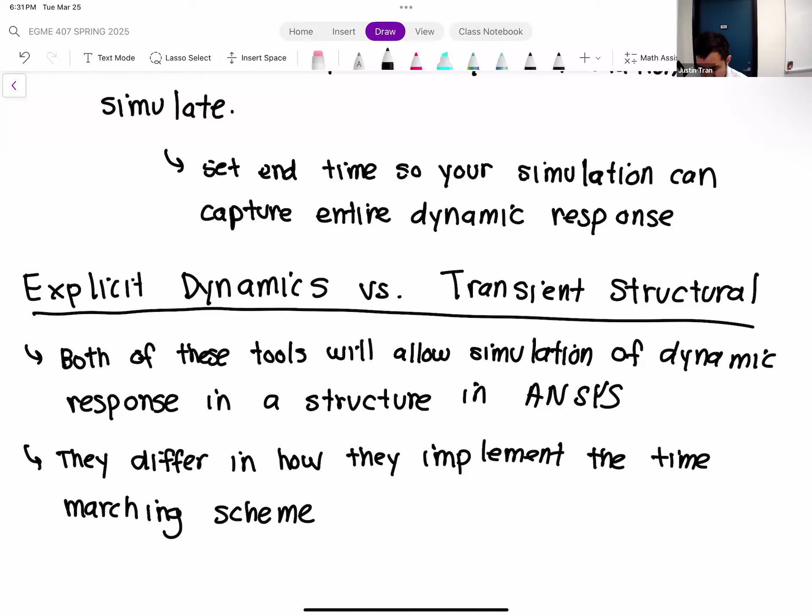So explicit dynamics obviously is an explicit scheme, and then transient structural is kind of the default implicit scheme within ANSYS.

Okay, so what do these terms mean? What does it mean for a time marching scheme to be explicit? And what does it mean for a time marching scheme to be implicit?

I like to think of the analogy with data extrapolation. Explicit time marching is very much like extrapolation of data, whereas implicit time marching is more closely approximating interpolation of data.

And so with explicit time marching, we are basically only using the information in our current time to estimate what the solution is going to look like in the next time. So some people think of it as kind of like shooting in the dark because you're only looking at the present and trying to guess what's going to happen in the next time frame.

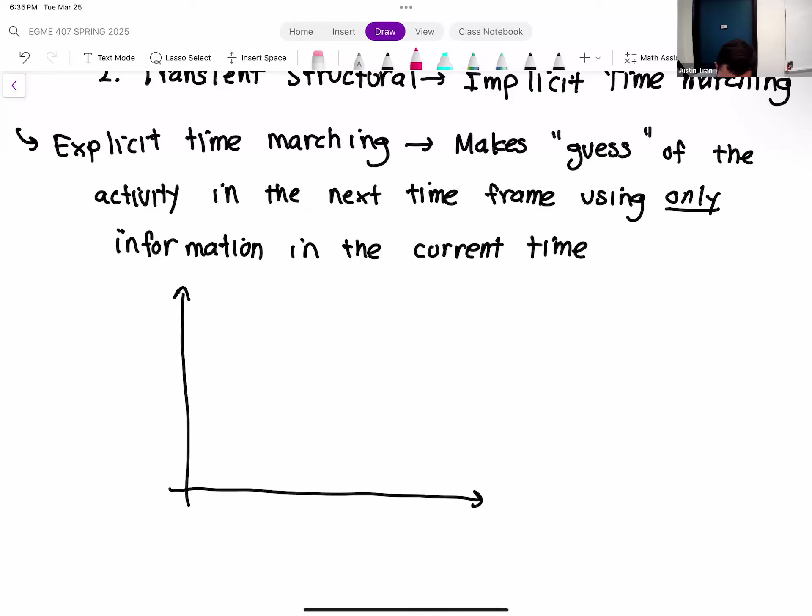So the analogy I'd like to use is if you have some data, let's say your data is following a certain trend like this, okay? So all the things in pink here, these are all the known data.

So with explicit time marching, you're making a guess of what the next data point is, without really any kind of safeties. You're just looking at your current position, the current trends, and you make a guess based on that. And so your next point, this right here, is what's called an extrapolated data point.

So it's just based purely on what's happened in the past, and then you make a guess of what's happening in the next step.

So with explicit time marching, what you have to worry about as a person using the software is that generally explicit time marching is a bit more unstable, and so you're much more likely to get a solution that makes no sense at all. But it is a lot faster than implicit time marching.

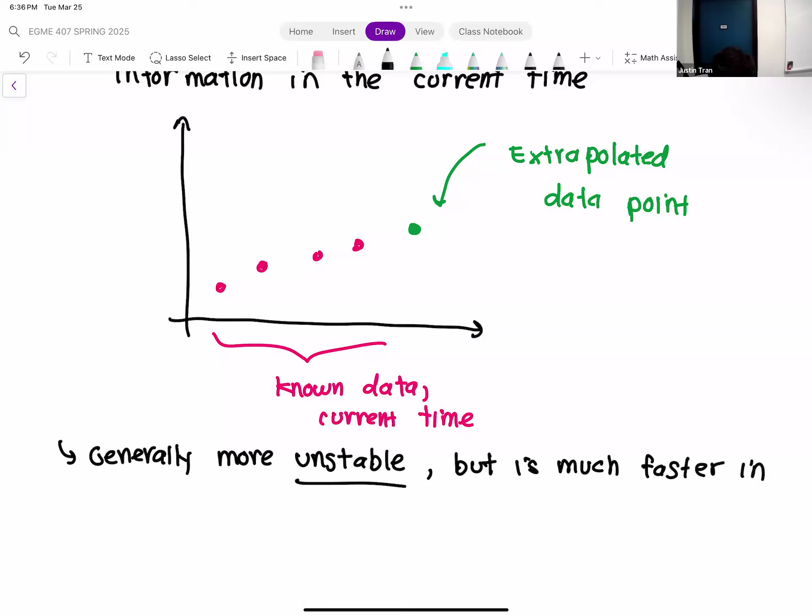So that's part of the reason we're using it on Thursday, because it is much faster than if you were to try to run the job on transient structural.

I think a couple of years ago I had a student that did try to run this activity using transient structural, and I think his computer just kind of crashed. So I wouldn't recommend it unless you have a lot of confidence in your computer.

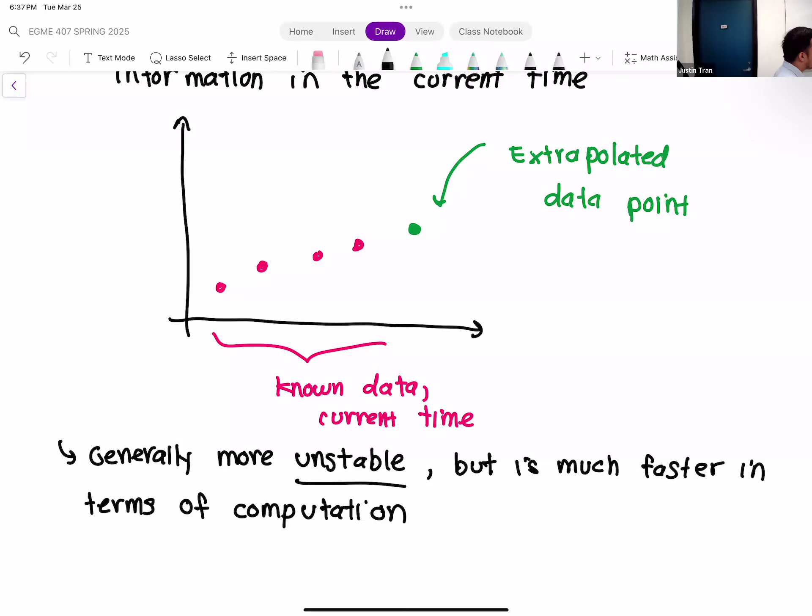But with explicit, the cost is generally a lot lower. The main thing to worry about with explicit time marching is that because the solution can be more unstable, there's much stricter requirements on the time steps.

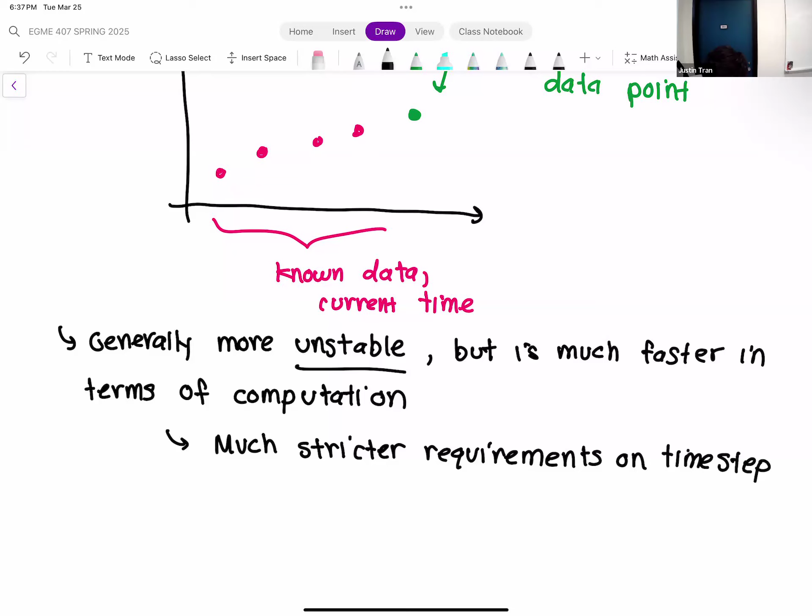The way these methods work is that the stability and accuracy of these simulations depends very strongly on the time step size. There's a very strict requirement, so you need to set that time step size low enough to get a stable solution. My rule of thumb is that if you have a phenomenon occurring very quickly anyway, just for the sake of accuracy and capturing your phenomenon, you're going to set a low time step size anyway. You might as well use an explicit scheme because it's going to be much faster.

And that's exactly the case of what we're going to do on Thursday. We have to set a small time step size anyway, because a car crash happens so quickly. So we might as well use an explicit scheme because it's going to be much faster for us anyway. In fact, most codes that I've worked with do use an explicit scheme, although they do some extra tricks to increase the stability. But explicit is very common just because it's much easier to implement in most cases. So that's what we're going to do on Thursday. Any questions on explicit time marching?